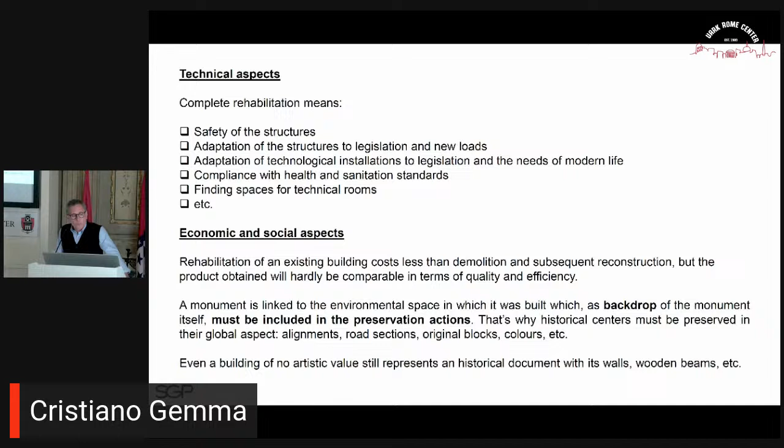As I said, we will return to the theory that we need for a renovation later. But we were talking about cultural aspects. When we approach a refurbishment project, we also have to consider technical aspects and economic and social aspects.

Technical aspects are very important, probably the real problem. The real problem is always to put into the existing building all the new stuff, all the new technologies, all the new plants, all the new installations that we need today. This is pretty complicated. It's not just a problem of installation and technological systems, but also a problem of structures, because the structures of the building must be safe and adequate to current regulations.

So we have to search for safety of the structures, adaptation of the structures to legislation and new loads, adaptation of technological installations to legislation and the needs of modern life, compliance with health and sanitation standards, finding spaces for technical rooms, and so on. A lot of things.

Finding space for technical rooms, for example, is something usually quite hard to do, because old buildings didn't have technical rooms, because there was no need for them—the plant installation was smaller, or there was no installation at all. But nowadays we need a lot of space for the MEP, for the ventilation, for the air conditioning. These are devices that need a lot of space for using them, and also for maintenance.

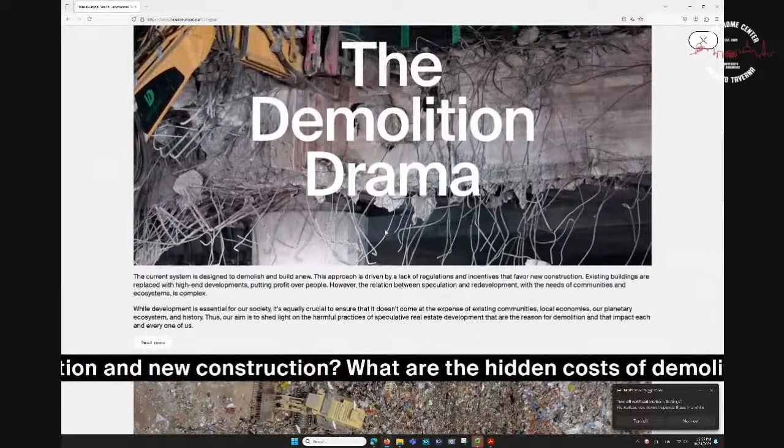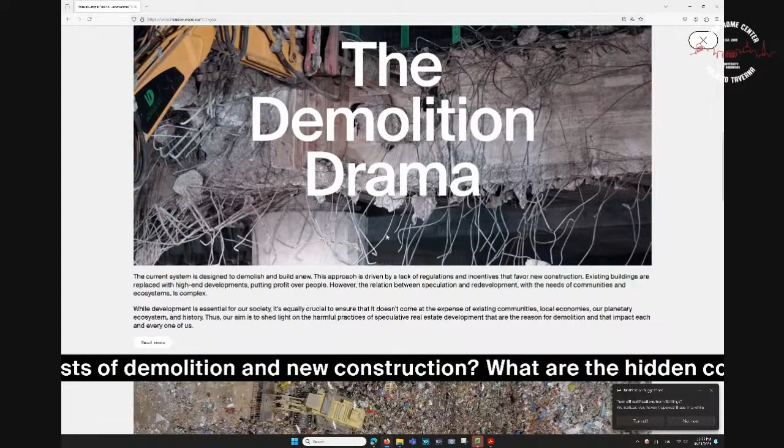it is a problem that people are talking about. Yes to renovation, not to demolition. Why? They indicate different reasons. The demolition drama, they say, is a problem because it wastes a lot of energy, because the building of a building is a very big waste of energy, and if you

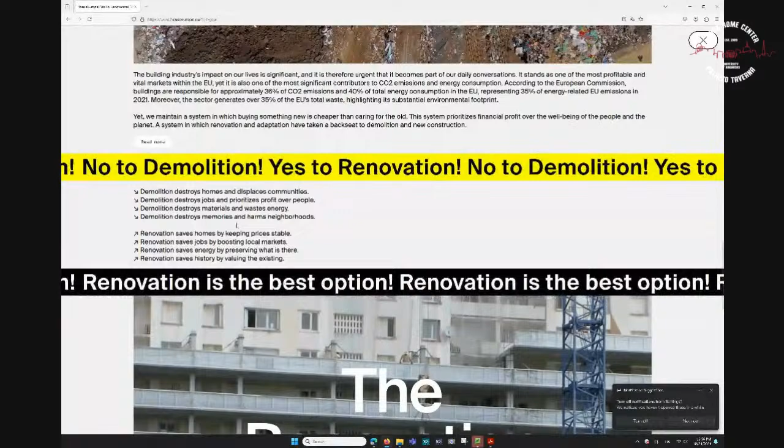reuse existing buildings, we can avoid this waste. There are also other aspects, like demolition destroys homes and displaces community, destroys jobs and prioritizes profit over people, destroys materials and wastes energy, memories, and so on. So you can see that there are many reasons for which we can decide to refurbish a building rather than demolish it because it's old and non-functional.

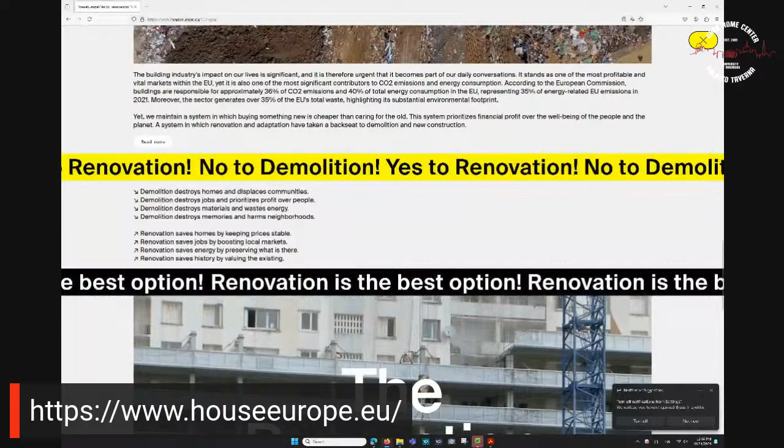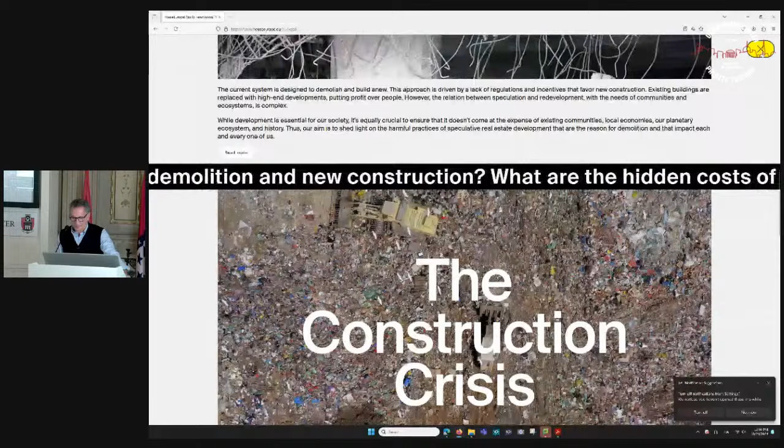If you want, you can go to this website, houseeurope.eu, and have a look at what they say. It's quite interesting. I don't agree completely with this website, with this association, just because I think that we cannot completely avoid building new buildings. Obviously, we must do it. There are many reasons to do it, and we also have to renovate. I think it's right, the word to renovate our building heritage, because otherwise, in I don't know, 100 years, we will have just old buildings with no functionality and no new architecture in our cities.

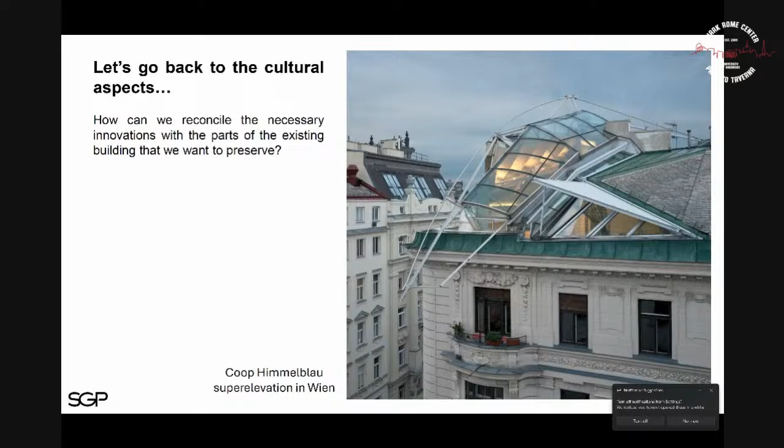So I cannot understand to answer the question: is it right? Is it right to let Massimiliano Fuksas do that in the center of Rome? And I cannot answer this question. I don't want to answer this question.

But what I know is that obviously these projects cannot be something that you do everywhere. You can do this kind of thing just once, in a very little number of cases, obviously. But we have to ask ourselves what we have to do, we that are not Massimiliano Fuksas, and we are not allowed to do this in the center of Rome.

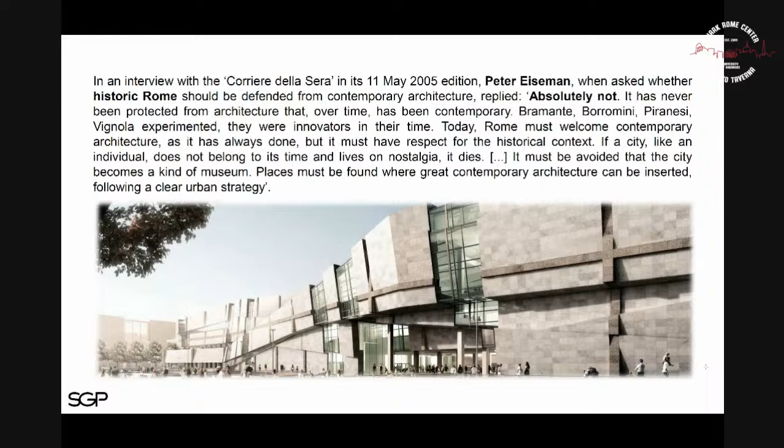Well, easy to say, but not so easy to do. But it's a point of view. Another point of view, of another architect of our history, Borromini, talking about Michelangelo. It's interesting, listen to the words of Borromini talking about Michelangelo: he said Michelangelo, Prince of Architects, used to say that who follows others never gets ahead of them. That means, again, that the history of architecture must go on, okay?

So what is my point of view? My point of view is that the answer is quality. The answer is quality. I think that if a project has a very high quality, I think that it can stay among other important and ancient monuments.

It's not so easy to define quality. If we think about Frank Lloyd Wright, it's quality, of course. If we say Louis Kahn, it's quality. But if we say Cristiano Gemma, or you, when you will be architects, how can you reach quality? Well, many scholars have tried to do it.

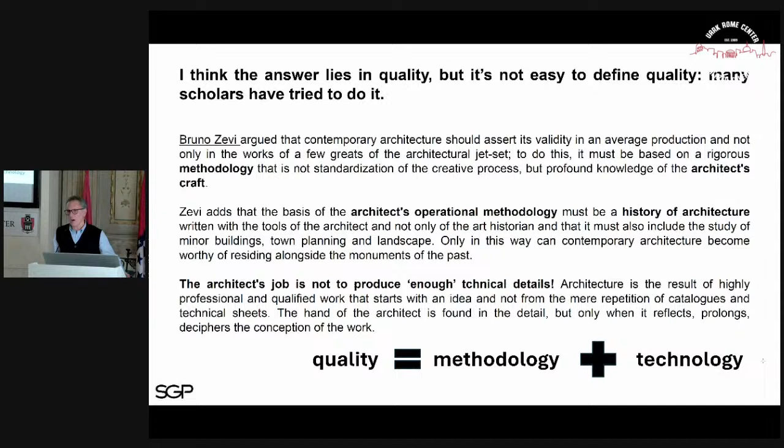I've tried to define what quality is. So once again, I will try to express myself with the words of someone more important. In this case, I want to talk with the words of Bruno Zevi, who has been one of the most important architects and writers in the architecture field in Italy. He argued that contemporary architecture should assert its validity in average production, and not only in the works of the few greats of the architectural jet set.

That's what I was saying. We have to try to reach a high level of quality, not just for Louis Kahn or Frank Lloyd Wright. We all must search for quality.

To do this, it must be based on a rigorous methodology that is not the standardization of the creative process, but profound knowledge of the architect's craft. So we have to study, we have to know technology, the architect's craft. We must know how we build buildings, not just how to design it. We have to understand the technology, the materials, the building, the structure.

It's very important. And Zevi also says that the basis of this architecture, of this quality, and the architect's operational methodology, once again method, must be a history of architecture written with the tools of the architect, and not only of the art historian, and that it must also include the study of minor buildings, town planning, and landscape.

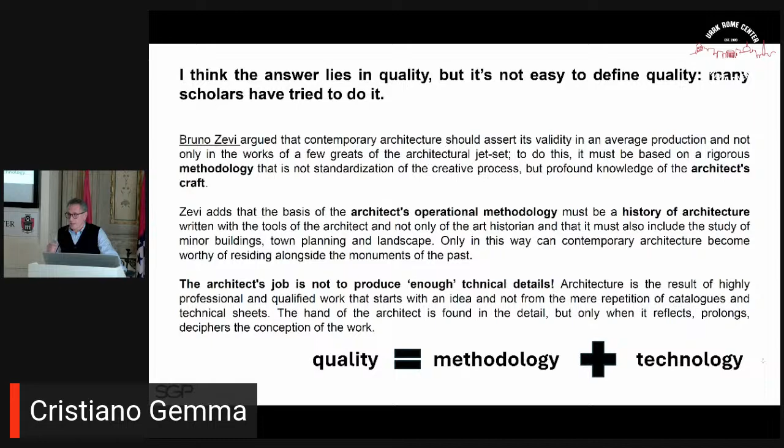But the problem is that very often we find the same kind of explanation in architecture books—the books we study in our faculty of architecture. If you buy a book about Frank Lloyd Wright, for example, they just show you the color, sometimes the shape of the building, and give you a lot of information on the date, where he was when he designed that building, and so on. But they never try to explain the real essence of architecture, how Frank Lloyd Wright thought about the space and things like that. So the history of architecture written with the tools of the architect is something we have to look for, and it's not so common.

Only in this way can contemporary architecture become worthy of residing alongside the monuments of the past. That's what I was saying.

And Zevi also said another very interesting thing. He used to say that the architect's job is not to produce enough technical details. This is fantastic, because we said the architect's craft is very important—we have to know how to build a building, how to make walls and columns and so on. But the design, the project, is never just enough technical details. It's never just copying some technical details—it's something else. So all these things must be put together.

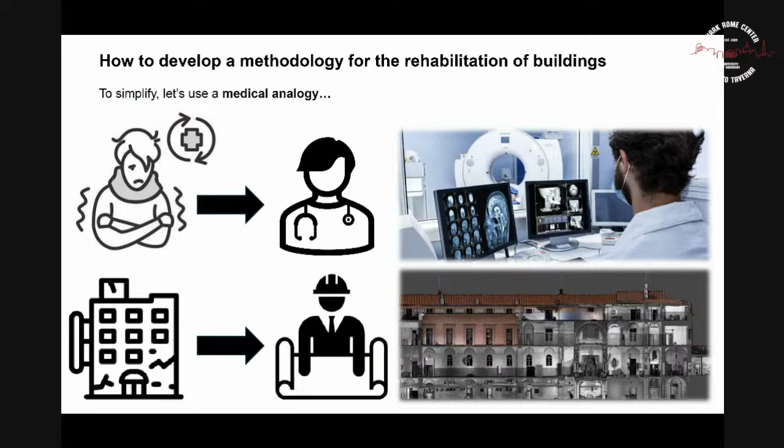So, design methodology: one, taking all necessary clinical examinations, if you are in the medical field. Two, analyzing symptoms. Three, making a diagnosis. Four, assessing possible treatments. And five, prescribing therapy.

Well, as I said, it's very similar. Instead of taking all necessary clinical examinations, we will try to have as much knowledge of the building as possible. That is our clinical examination of a building, okay? And this is very, very important, because it's the first thing we have to do with an existing building.

So how important is the knowledge of the building? Very, very important. Then analyzing the symptoms: two, cataloging the elements. It's the same - in a building there are elements, like the parts of the body, and we have to understand what these parts are for and what's the problem with all of them.

Three, making a diagnosis - analyzing the data obtained. Four, assessing a possible treatment - establishing an intervention code. What's an intervention code? We will see. Five, designing according to the intervention code, that is prescribing a therapy. This is very important.

Now, what I'm going to explain with the next slides is, as we said, a method, but it's a method, not the method. It's my method, the method we use in our firm, a method that I've thought about over these years. It's nothing new - it's just, how do you say, putting some ideas in order. I don't know if you understand this expression, but it's just a method.

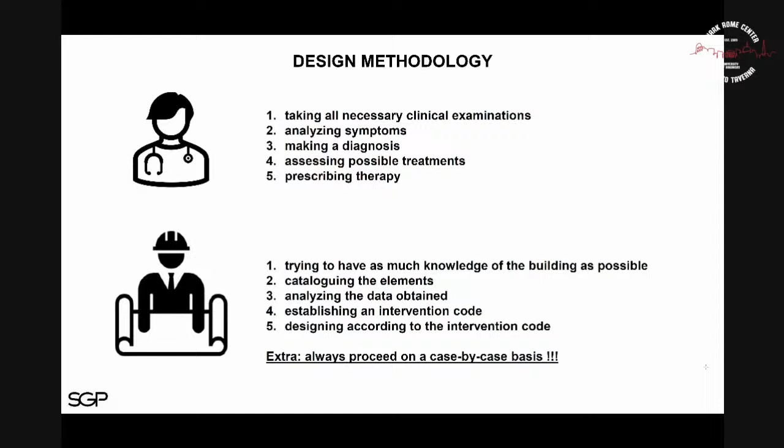And also my method, it's something I don't use always in the same way, because the real first and only principle of working on an existing building - restoration or renovation, it's the same - is to proceed case by case. This is the only real rule. You have to proceed case by case, always.

So, let's return to the method: achieving as much knowledge of the building as possible. Today we have a lot of different ways and technologies to achieve this knowledge. Laser scanner is something fantastic, because 20 years ago laser scanner was just for very important projects, very important buildings, and so on. Nowadays, laser scanner is quite cheap.

There are a lot of professionals that do this kind of work, that give you a complete laser scanner measurement of the building, and you can have a perfect image and all the drawings of the building with just 2-3 days of work. You can also have very precise drawings of the building, because when laser scanner was not so easy to access or use, it was almost impossible, not impossible, but very, very long to design, I don't know, a vault like this one, or a room like this one that we are inside.

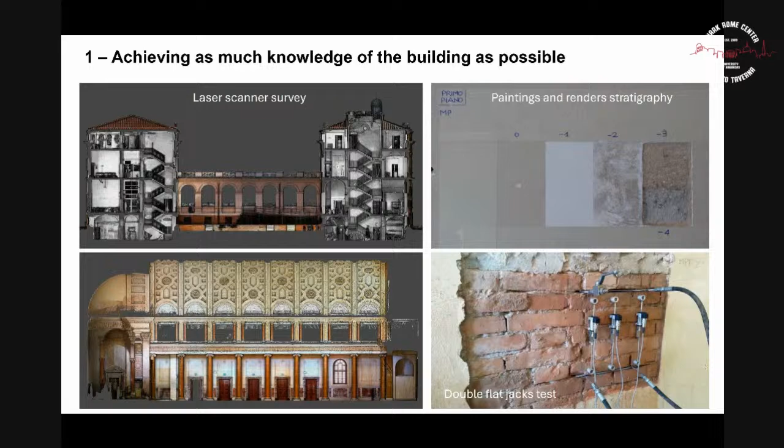But we also have other technologies to understand the structural situation of the building, like the double flat jacks test, where you put two jacks inside the wall and press the part of the wall between them, measuring how the bricks react. From this you can understand the capacity and strength of the bricks and of the wall. These are just 2-3 different ways to have knowledge of the building, but there are many different tests we must make on an existing building.

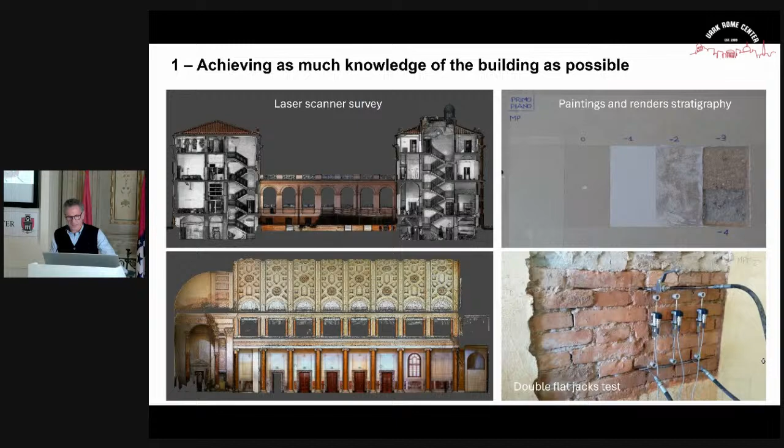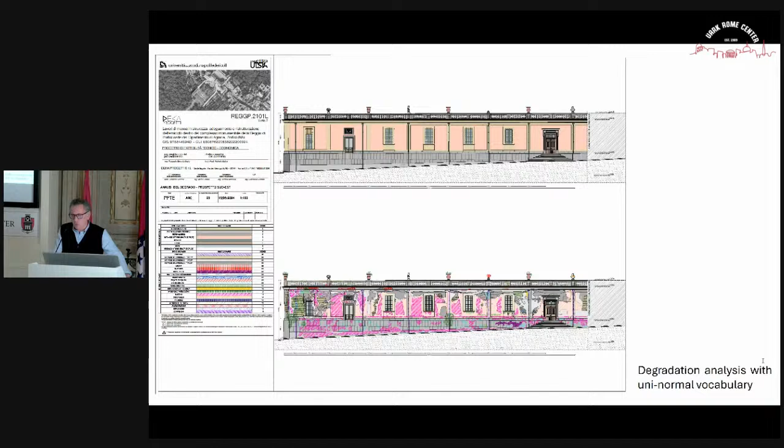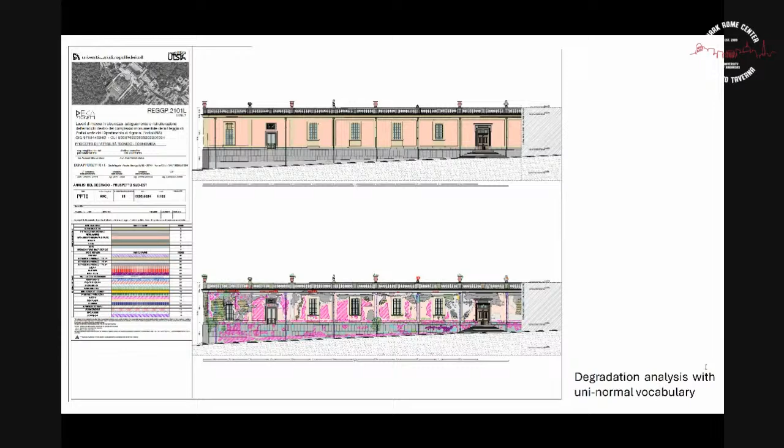Then we have to make some drawings with this data to understand the situation. For example, for the facade and external walls, in Italy we use a uni-normal vocabulary. That is to say that all different kinds of degradation of the wall must be represented, drawn with a different line, a different edge, and so on. These are all different ways to understand the situation of the building.

This is the same, for example just cracks. How do you say - analysis, cracks and instability analysis.

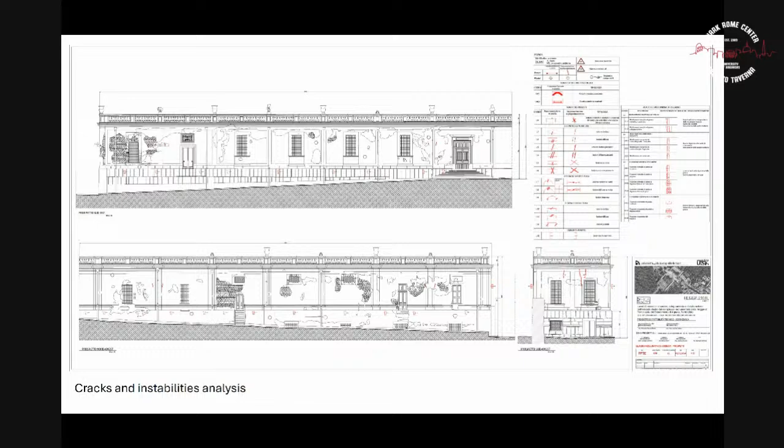Then we said, you remember, cataloging the elements. So what does cataloging the elements mean? In my method, the way we do it - as I said, it's not the only one - we usually try to divide the elements inside a building into different kinds, and we divide it usually into 4 different types: unrepeatable elements, repeatable, secondary, and disqualifying elements.

What are, in our method, the unrepeatable elements? Unrepeatable elements, as the word expresses itself, are elements in the building that cannot be repeated. You cannot make it similar, you cannot replace a part of it. If you have a fresco from Giotto in your building, you cannot replace a part of the fresco because you are not Giotto. So there's no way to replace and repeat that element.

In those cases, as you see in the picture above, if you have a fresco, you usually do not replace the missing parts. There are many different techniques to complete or restore a fresco or a painting. You can leave part without drawing, or as in the other picture, you can just draw the outlines. There are many different and more advanced techniques, but the idea is that some parts of an existing building are sometimes non-repeatable, unrepeatable elements, and there's no way to reproduce them.

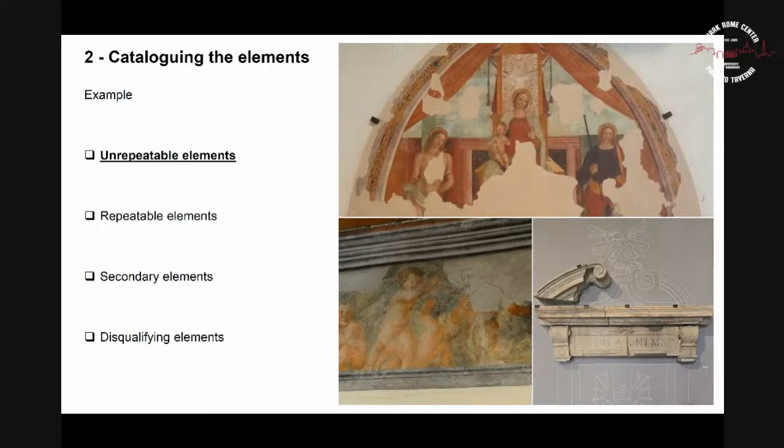Then we have repeatable elements, which are elements that are interesting for some historic or artistic reason, but these elements can be repeated. If you miss a part of that decoration in the upper side of the slide, as you have all the other parts of the decoration, you can replace it, because this wasn't made by an important artist or with some kind of knowledge that you don't have today. So if we have the technology and the ability to do that, we can replace it because we know perfectly what was the shape, form, and color of the missing part. The same could apply to a decoration on the wall or part of a steel gate, as in this picture.

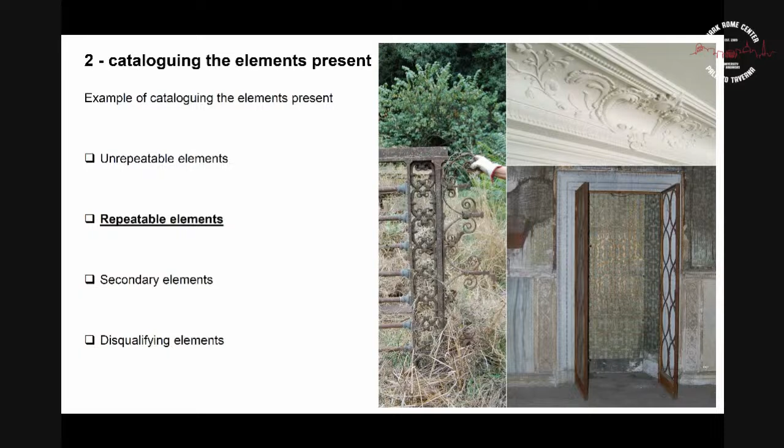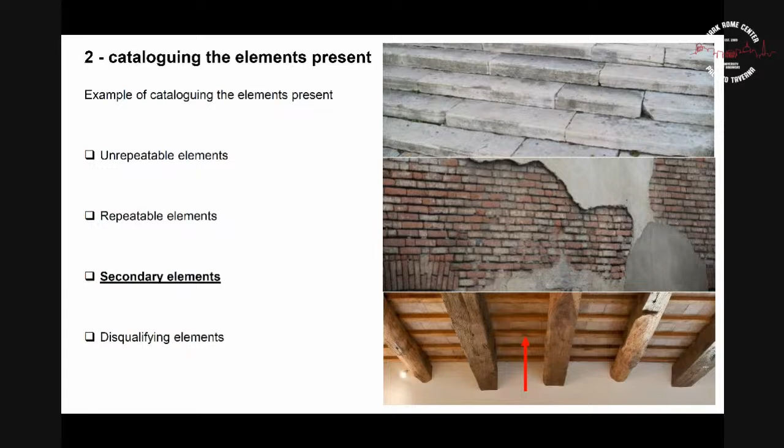Then we have secondary elements. I used to call these elements the sacrifice part of the building. A render is a sacrifice part of the building because it's made to be sacrificed, being the more external part of the building - every 20, 30, 50, or 60 years you will have to replace the render. So it's a part of sacrifice. These secondary elements can be the step of a marble stair, the render as I said, the beams of a wooden structure, and so on. These parts are very easy - it's not the correct word, but it's right - to replace, because they must be replaced to maintain the functionality of the building.

Then we have disqualifying elements - elements that must be removed because they are not original and are part of the building that has been added during the years, and the best thing is to remove them.

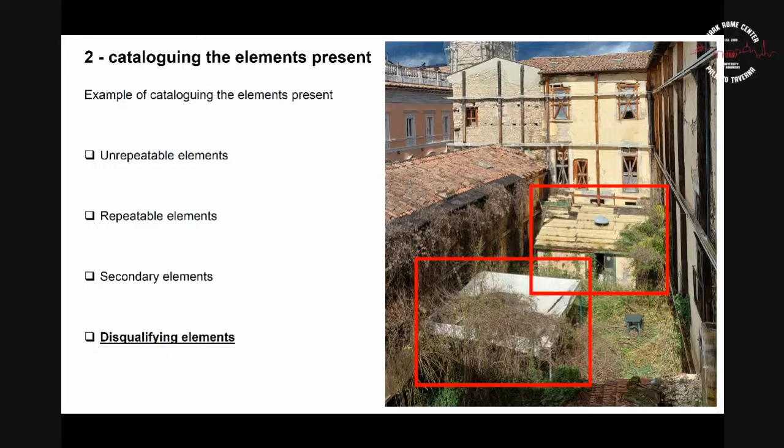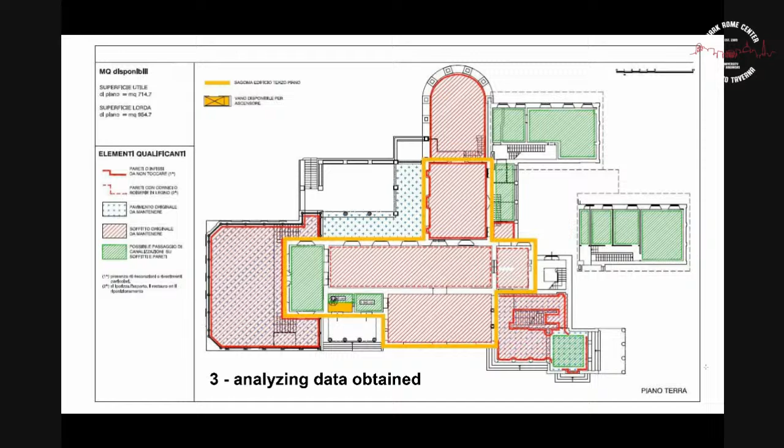So once we have made this cataloging of the elements, we can analyze the data obtained, and we can do that with different kinds of drawings in which we indicate the different parts of the buildings. We do that because we want to arrive at an intervention code.

So the aim of this method is to arrive at an intervention code. What's an intervention code? It means giving ourselves the rules that we are going to use in the project, in the design process, because otherwise we could just decide what we want to do without any rules - I like it, I don't like it, it's interesting, it's not interesting. So the intervention code is based on the different elements that we have checked.

It must be guided by a clear and recognizable logic. The most important elements characterizing the building must be cataloged and classified, and this classification will guide future choices, so we can have different kinds of intervention.

We can have conservation works, and obviously conservation works will be used with unrepeatable elements, aimed at the conservation of particularly valuable elements without altering their appearance. We are in the field of restoration: cleaning and removal of substances on the surface, consolidation of damaged elements, and so on.

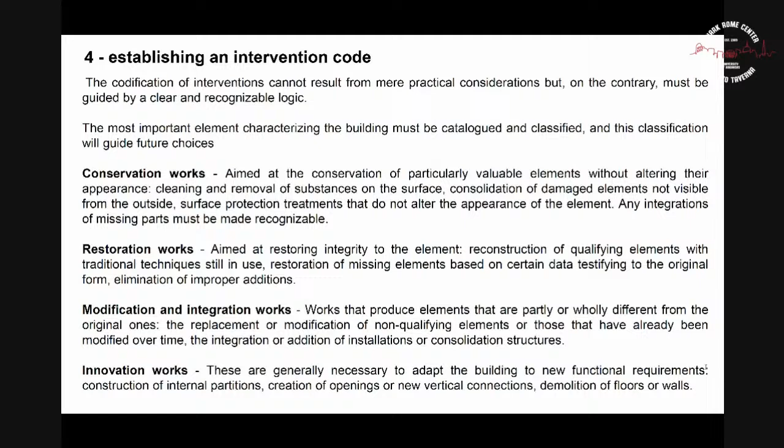What do we do with all these elements? Usually we place them in real drawings, in real sheets, in real documents to use in the project, to give to the clients, and to use when we go to talk with the heritage...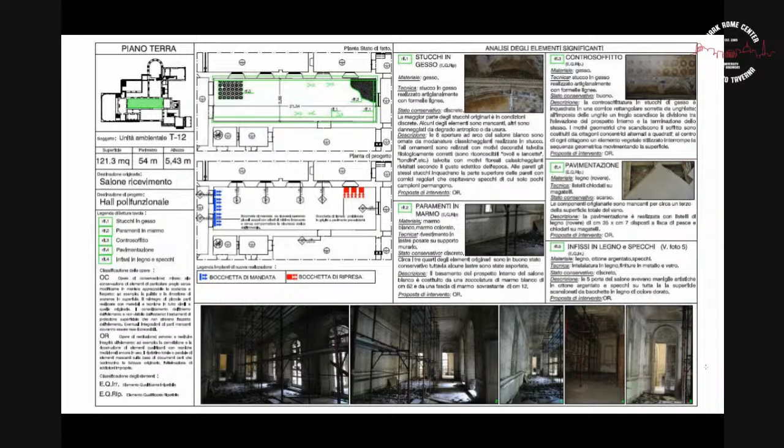We classified them as repeatable or irrepeatable elements, and we also indicated the kind of works - you see 'classificazione delle opere' on the left. There are different kinds of works that we thought of for that room, for those elements. So this is not just a theory, not just a method, but a practical way of approaching the design. Now I have completed this part.

I just want to show you some more pictures to make you understand how this method can solve some problems, how we can use it to decide some things.

For example, this is Palazzo Marrelli, an ancient building in L'Aquila destroyed by the earthquake, which we are designing right now. We don't have pictures yet because we are designing it right in these weeks. As I said, what we are trying to do is get as much knowledge as possible of the building, so we decided to make a virtual twin of the building and redesign it completely, redraw it completely in 3D.

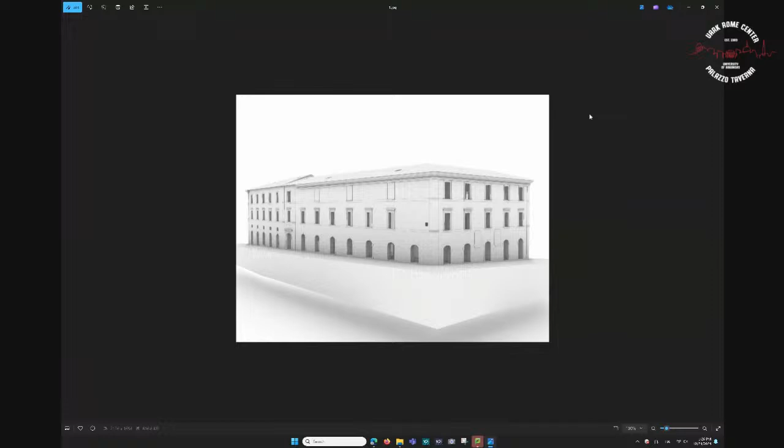And then we use this 3D model also to apply the results of the analysis of cracks, instability, and degradation of the materials on the external walls. We applied all these things in the 3D model because it helped us understand the situation of the building.

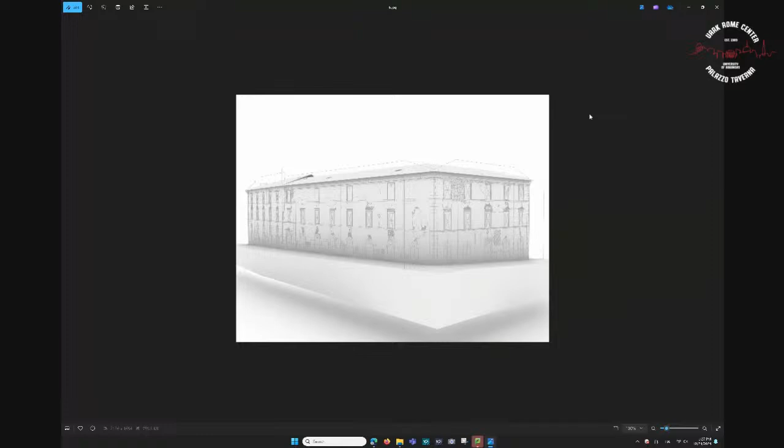This was a very, very ruined building from the earthquake. We studied the situation of the different walls and vaults inside the building.

This is the building from outside. But if you take away all the external walls of the building, that's what is left inside, and you see three different colors. The white walls are not shown because they are the existing walls in good condition. The red walls are walls that were ruined during the earthquake - these were existing walls, but they are no longer there.

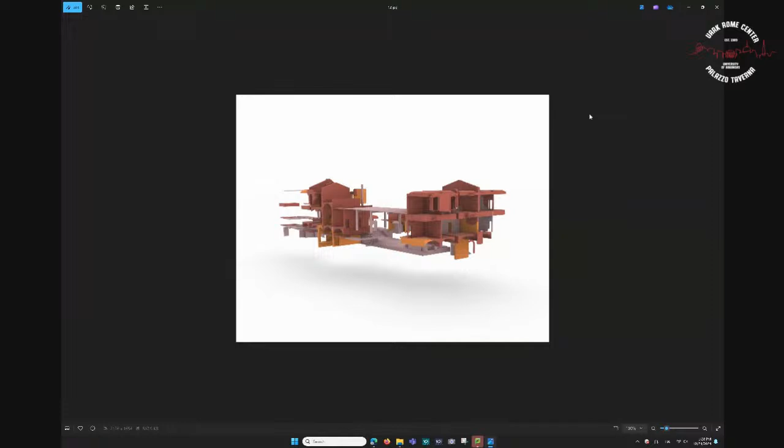Then we have the orange walls that are partially ruined, and all the purple - or whatever that other color is - walls or vaults are disqualifying elements. That is to say, elements added later, or different kinds of floors that were rebuilt, and so on.

Ah, very good. Okay, very good. So...

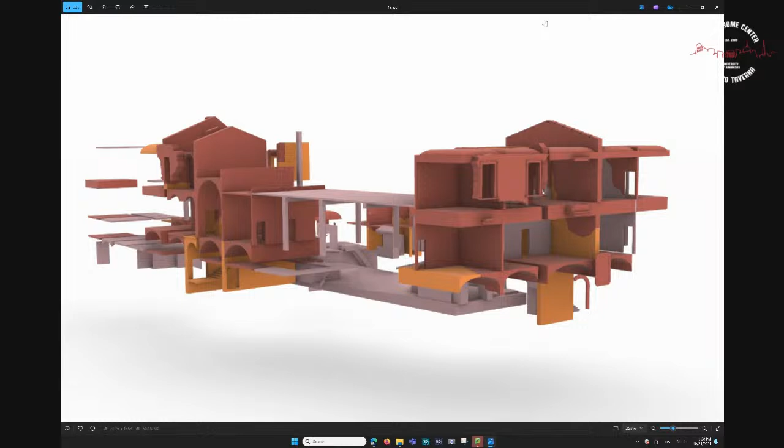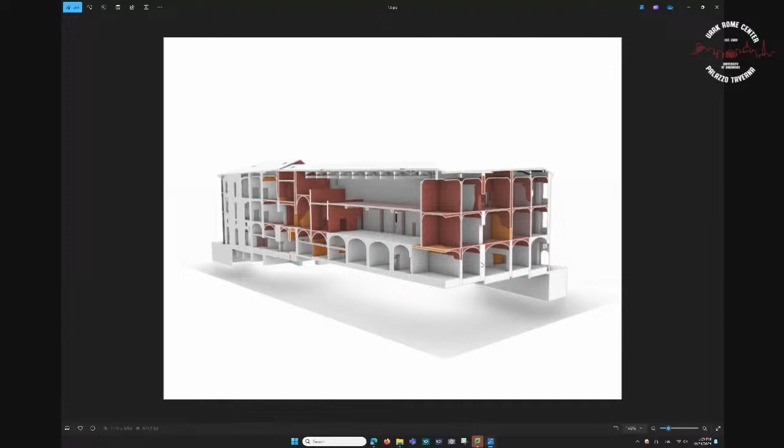In this slide you see the walls in red, orange, and purple, and in white the existing walls that are still there. So what we tried to do was empty the building, to take off all the orange, red, and purple walls and vaults, because it was impossible to rebuild an ancient building or ancient vault. It was in this case an operation with no sense.

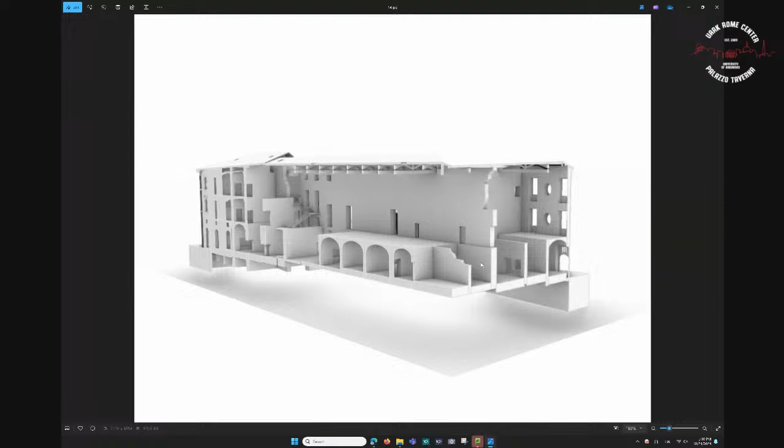We also tried to take away the disqualifying elements and the partially ruined ones. So we understood that there was a big empty space inside the building, and we decided that this was the right place for an auditorium. That's exactly what we are trying to do. It was not a precise request of the client, he just asked us for a public space. But studying the building, we understood there was this big space, and it was very interesting to use it as it was a big empty space.

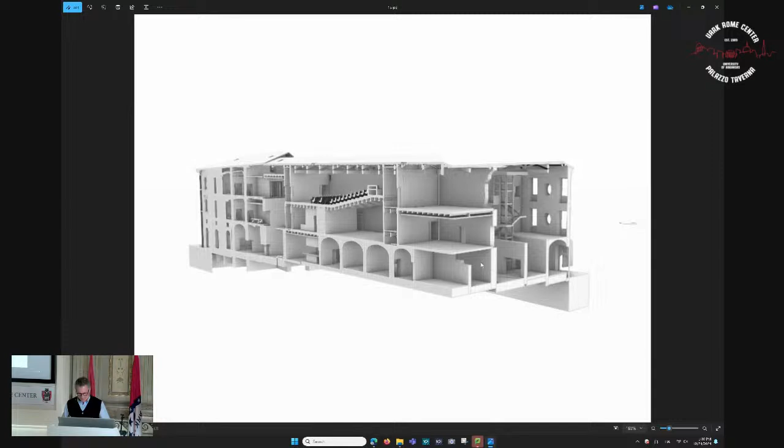So this is the same part of the building, but with a section view that lets you understand better the history of the project as we are doing it. The same thing we made on a different part of the building.

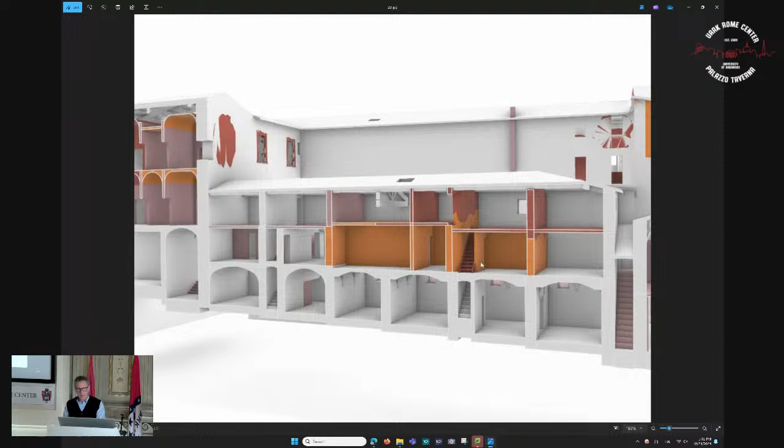Here, for example, there's a co-working space. We are designing a co-working space, and it's exactly the same situation: a lot of walls demolished, ruined, resulting in an empty space that we are going to fill with this co-working space. This is just an example.

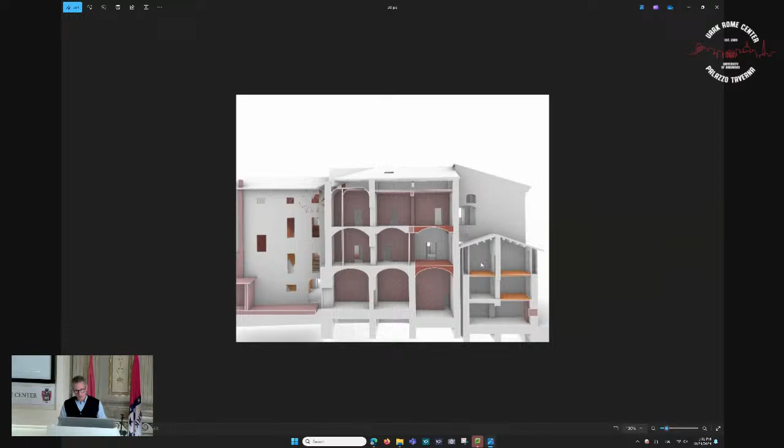This is a different part of the building. You see the same, it's the same approach. We had to find a place to put the stairs, and we decided to put the stairs in this part of the building for exactly the same reason.

So I want to also show you, what time is it? We have time? Not very much? Two minutes.